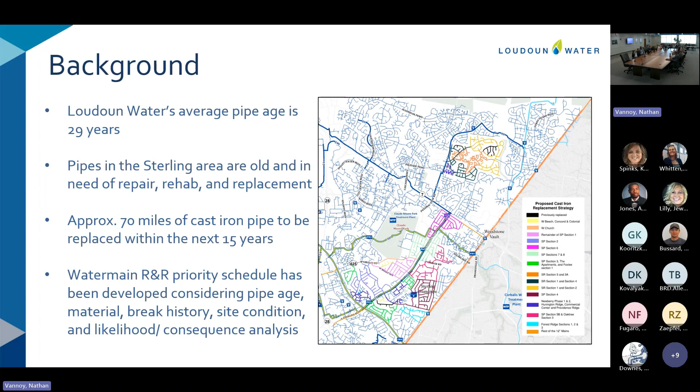Any question? If not, I'll be talking more about the specific project today. The project for your consideration today is again central system in Sterling area, in two different areas, Countryside and Sterling Park.

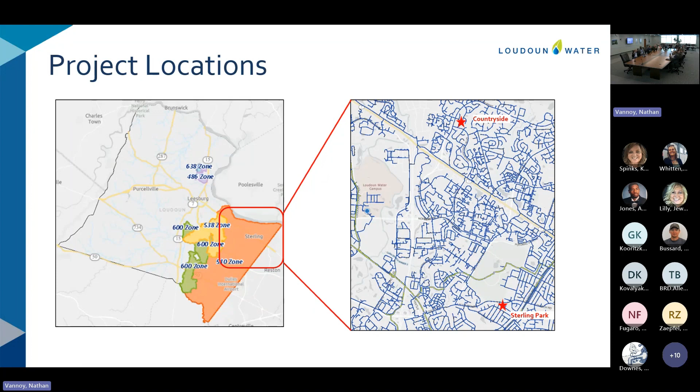Dialing deeper into the project location, we're talking about approximately 3,000 linear feet of pipe replacement, in Oakdale Court and Lindenwood on the left, and West Ash and North Ash Road in Sterling Park. Overall, the goal is to replace about 3,000 linear feet of pipe. This will impact about 77 service lines and several fire hydrants and valves. The reason we prioritized this particular project early is there's known extensive corrosion in this pipe and a much higher concentration of breaks in the last 5 to 10 years.

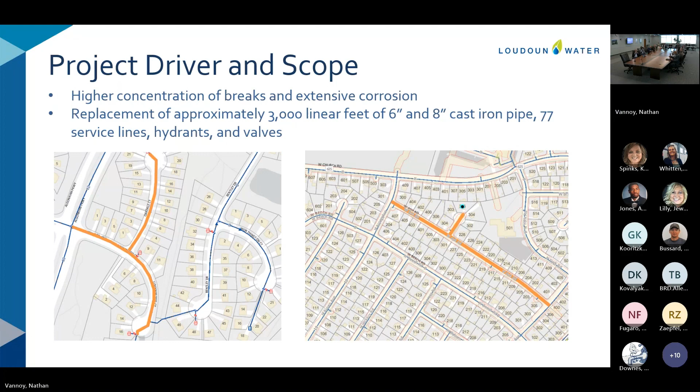For this project, we have selected J2 Engineers as design consultant. J2 Engineers is one of our civil basic ordering agreement consultants. They've done projects like this for us before, several, and they're also well regarded to do a water main project like this on the private side. In this project, J2 Engineers' scope can broadly be categorized into project management, design services, permitting, and bid phase services. A lot of survey, geotechnical investigation, and utility locating is needed on this project. We do anticipate significant coordination with VDOT, just because of the impact this project would have on local traffic and residents.

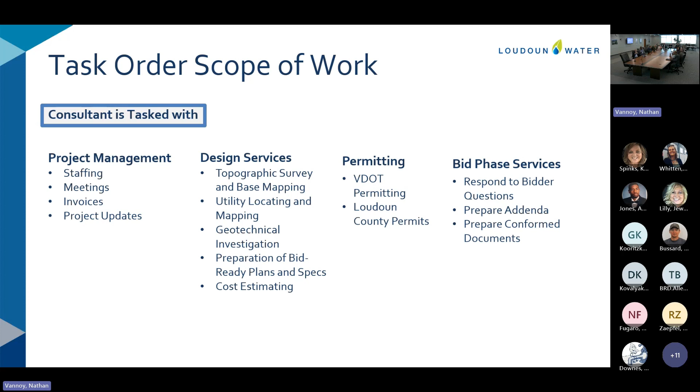Any questions on the fee or scope? Yes, I do have a question. What kind of pipe were you planning to replace the cast iron with? Ductile iron, that's our standard material. Okay, great, that's what I thought.

This fee breakdown is an estimate of the hourly billing? Yes, the way we build it is from the bottom. We identify each and every task and subtask, and then look at what labor category is needed for every task and subtask. There is some negotiation, and that's how we were able to agree on this fee. Clearly there's a lot of field work. Oh, there is a lot of field work on this project.

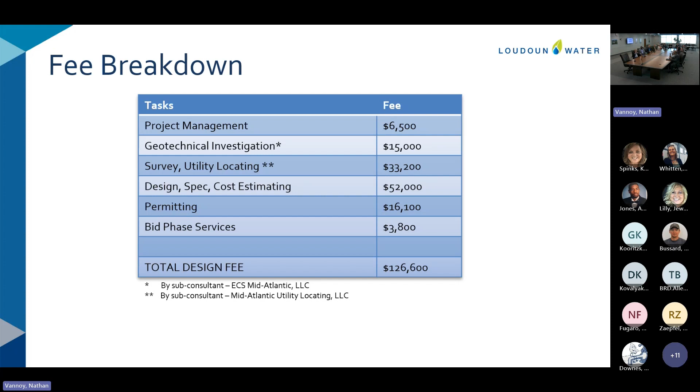Do we have any asbestos cement pipe in the system? Not in the water system that I know of. We do have that on the sewer side, but no asbestos pipe in our drinking water, potable water system.

On project schedule: it's a relatively small project, but we're being a little conservative with our estimate on the design, mainly because of the time it may take for VDOT coordination. We're estimating 16 to 18 months for design, 3 to 4 months for bid, and 18 months for construction, which includes about 5 to 6 months for material.

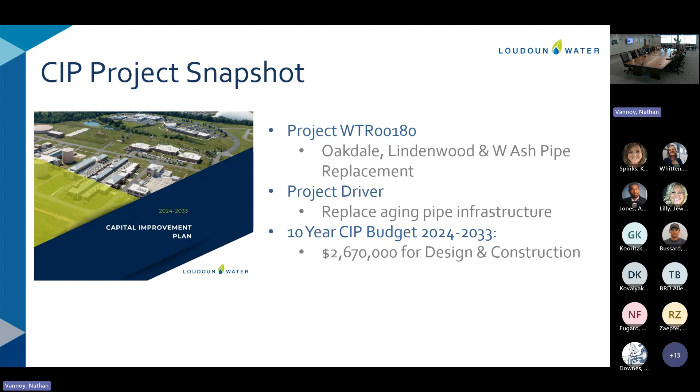So with that, I have the motion in front of you. Who wants to do it? Any other questions? Thank you.

I can make the motion. I move the recommendation to the board to approve award of a design task order for the Oakdale, Lindenwood, and West Ash pipe replacement project to J2 Engineers Incorporated for an estimated cost of $126,600, with an approximate 5% contingency to be controlled by the general manager, for a total authorized budget of $133,000. Additional costs will require board approval, and I'm recommending this go to the consent agenda for the board.

Do I hear a second? Second. All in favor? Aye. Nobody opposed? Thank you.

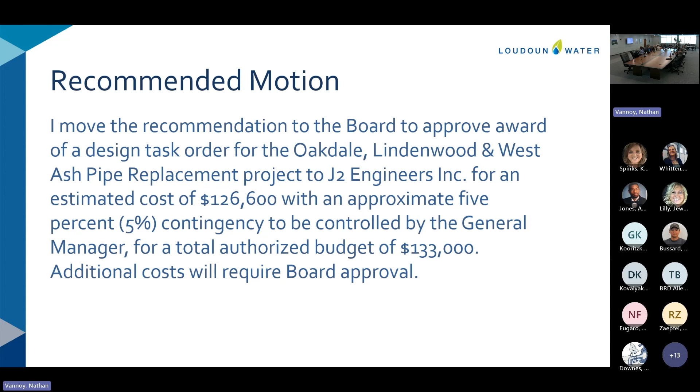Thank you, Mr. Chairman. Is it consent or action? No, consent. I don't think she heard you. Yeah, I did that.

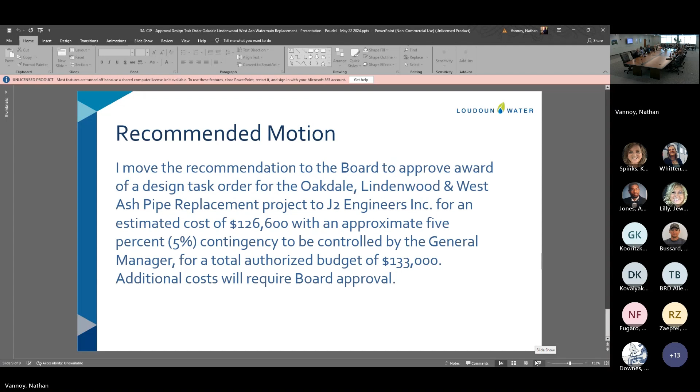Okay, the next item is an informational item, joint county partnership projects.

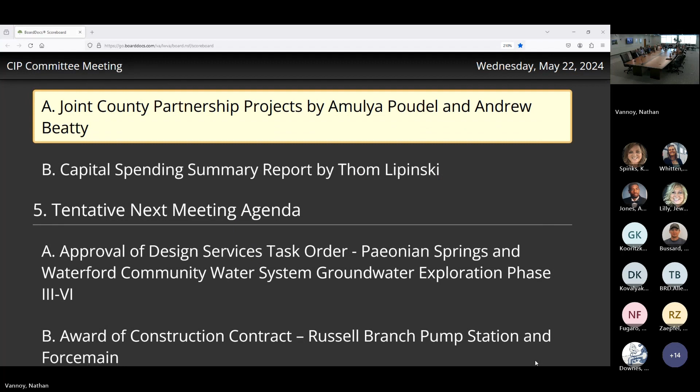Good morning, Mr. Chairman. Is Terry on? Yes. Okay, go ahead. Good morning, Mr. Chairman, members of the committee. My name is Andrew Beatty. I'm a manager of planning initiatives here at Loudoun Water, and Amulya and I will present this informational item on joint county partnership projects.

Just a little bit of background, as you may already know, we do have a partnership program with Loudoun County called the Water and Wastewater Program. That was initiated really through the execution of our MOU back in June of 2015, almost 9 years ago to the day, actually.

The goal of the program is to have an avenue for residents within the county and communities to come together who are experiencing issues with their water or wastewater systems, their individual systems generally. It's a place for them to come and apply for assistance to the county. So that's the goal of the program.

What the MOU does is lay out the roles and responsibilities between county staff and Loudoun Water staff. County staff leads the application period, the outreach, and manages the program, whereas Loudoun Water's role is more on the technical side, where we would take the lead on conducting feasibility studies for these communities whenever they apply. Should a project move forward, Loudoun Water would take on the design and construction and ultimately the operation and maintenance of new community systems, if that is the solution.

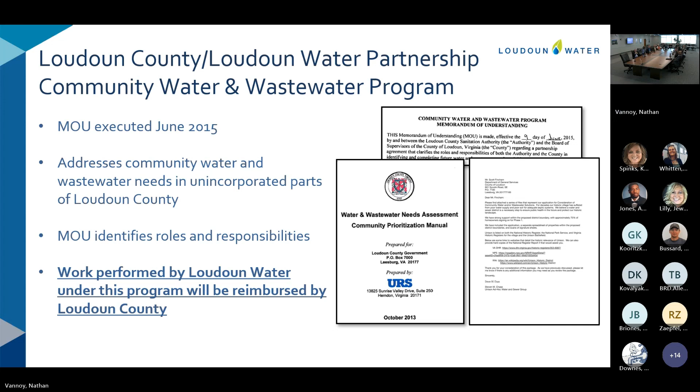The other 4 projects are all in the rural policy area, where communities have been experiencing water and/or wastewater concerns.

I noticed in the news that Waterford's starting an archaeological project. Does that have anything to do with the water system? No, not directly. That's being undertaken by DTCI for a larger landmark project looking at traffic calming and stormwater issues and that type of thing. So it has no direct connection.

I'll first talk about the projects in Unison and St. Louis. Unison is a small community of about 34 homes. They applied to the program back in 2020, and Loudoun Water scoped it and brought it to the board, completing the feasibility study in 2023. The goal was to look at both water and wastewater concerns they were experiencing. The recommendation from that study was for a new community water system and a new community wastewater system.

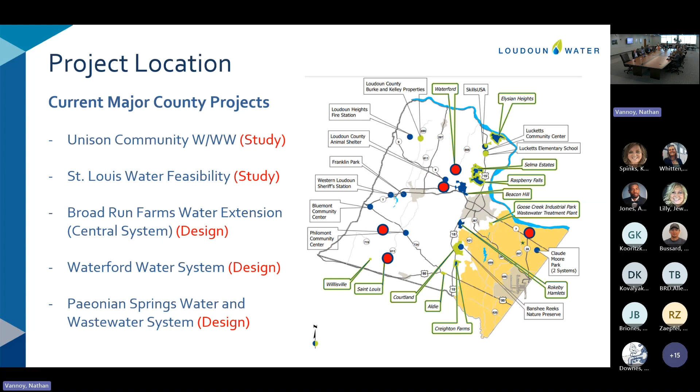Broad Run Farm Water Extension Project.

Again, this project has been going on for a while. This abandoned landfill, Hidden Lane landfill, in 2017 or 18, EPA designated this abandoned landfill as a Superfund site. And as part of their remediation project, EPA decided to extend public water mains to this area where EPA determined their groundwater wells to be contaminated because of this abandoned landfill.

This area in green shade here represents a portion of the community where EPA will extend the public water mains and connect all homes there into the public water system. After EPA decided that, the county decided to extend public water main to the remainder of the community, which is the pink shade to the left, and Loudoun Water is managing the county portion of the project. I'll be talking more about the county portion of the project that we're jointly managing with the county.

This project, the Broad Run Farms project that Loudoun Water is managing, it includes approximately 22,000 linear feet of pipe, 8-inch to 12-inch. On the county portion of the project, there are 311 lots. Combined with EPA project, there are 453 lots in Broad Run Farms community.

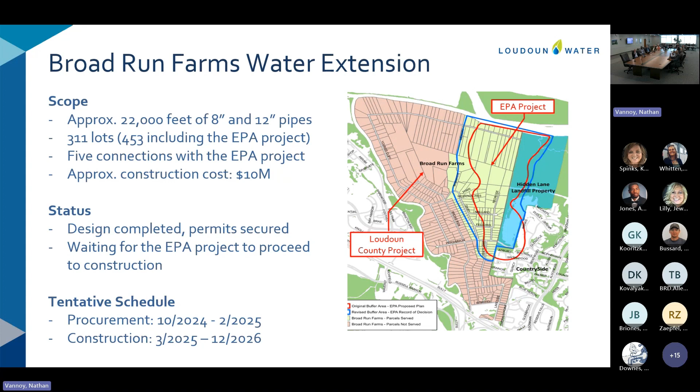Next here I have is Waterford, and a couple of different things happening in Waterford. There are 3 major projects underway in Waterford going on. The first one is Loudoun Water's project that you all have seen before. We have a wastewater community system, existing community system in Waterford. We are in the process of upgrading that plant.

Now that is Loudoun Water's project. The county is not directly involved on that project. The second project in Waterford is the community water system. I'll be talking a little bit more about this one in the later slide. So this project, this is the county's initiative managed by Department of General Services.

We are assisting the county per our understanding with the county's water wastewater program. The third project in Waterford is a larger infrastructure improvement project, sometimes referred to as the landmark project. It's looking into improving drainage, traffic calming, sidewalks, and burying the overhead electric. This is the county's project, managed by the Department of Transportation and Capital Infrastructure. We're only involved because of the way the schedule lined up.

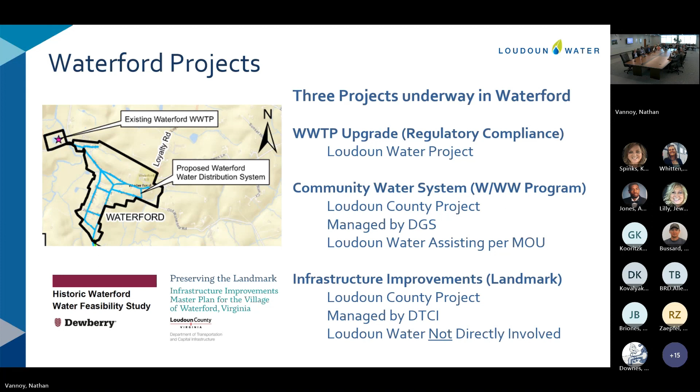We'll definitely be inspecting, since it'll ultimately be our asset, but in terms of selecting the consultant that designs it, we won't have involvement on that side. It'll also have to go through our land development process for review and approval.

This slide is specific to the water system in Waterford. Waterford has known well yield issues, more on the quantity side. The county initiated a water feasibility study in the community, completed in 2022. The current wastewater service area has 145 lots within that study boundary, and we're looking at that same service area for the water extension project too. The study recommended that a public community system be extended to the community. The high-level design cost estimate is $1.5 million, with a construction cost estimate in 2024 dollars in the range of $10 to $17 million.

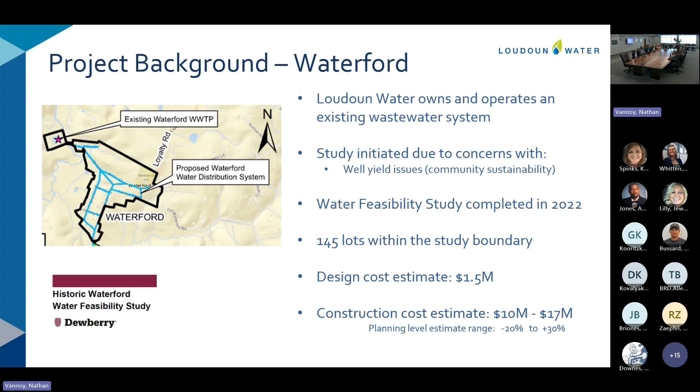The next project, not very far from Waterford, is Paeonian Springs. There is no community water system or wastewater system there. The community faces challenges on both quality and quantity for water, and on the wastewater side, many small, narrow lots have non-compliant waste disposal systems. The county initiated a study, completed by Loudoun Water with Dewberry, wrapped up in 2019, with a couple of supplemental tech memos completed over the next few years, finishing in 2022.

In Paeonian Springs, after several iterations, the boundary we settled on includes 201 lots we're currently looking at. It's a bigger project there. The design fee is in the range of $3.5 million, and the construction cost estimate is $34 to $56 million, again in 2024 dollars, not escalated to the midpoint of construction.

Who would be paying for that? The county, and the county is hoping for federal government support as well.

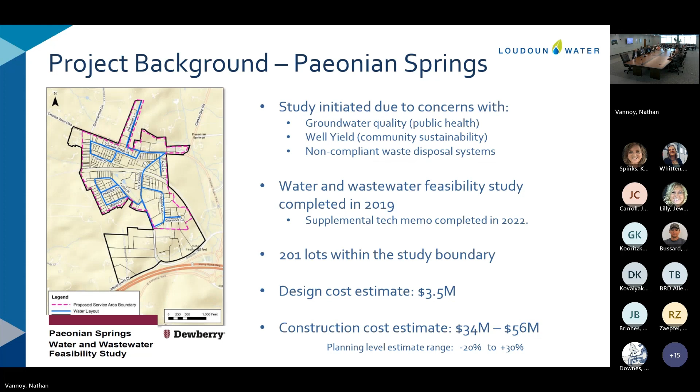Before this slide, the two other slides I talked about, Waterford and Paeonian Springs, at the time those studies were completed we were looking at these two communities separately, with local solutions for each. However, since the studies came together around the same time, there were some additional considerations.

In April 2022, the Board of Supervisors approved $3.5 million in federal ARPA funds for the design phase of the Paeonian Springs water and wastewater work, of which $3 million the county transferred to Loudoun Water. Last year in February, the Board of Supervisors approved $1.5 million for the design of the water system in Waterford. In that same meeting, the Board directed county staff to look at the feasibility of addressing similar needs in the two communities, which are only about 2.5 miles apart, by coming up with one system that could serve both communities.

So what that means is evaluating the feasibility of taking Paeonian Springs sewage along Clarkes Gap Road to the existing treatment plant in Waterford for the wastewater component, and for water, to evaluate if it was feasible to locate wells between the two communities, and then have one treatment plant that can serve both Waterford and Paeonian Springs.

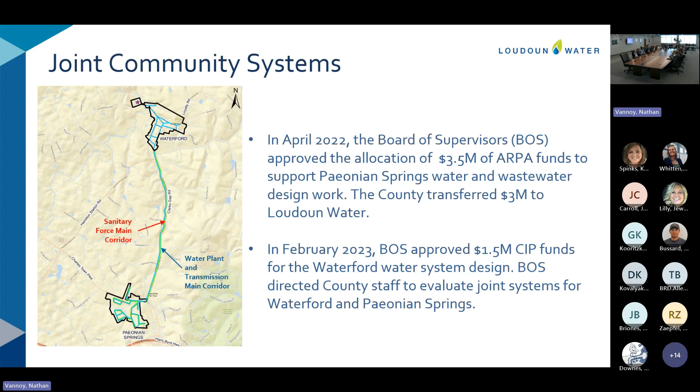So, okay, the groundwater study is carried out in 6 different phases. The first phase is desktop study. You know, it's actually easier with the exhibit, so I'll talk about it on the next slide. Thank you. Yeah, that's a better slide.

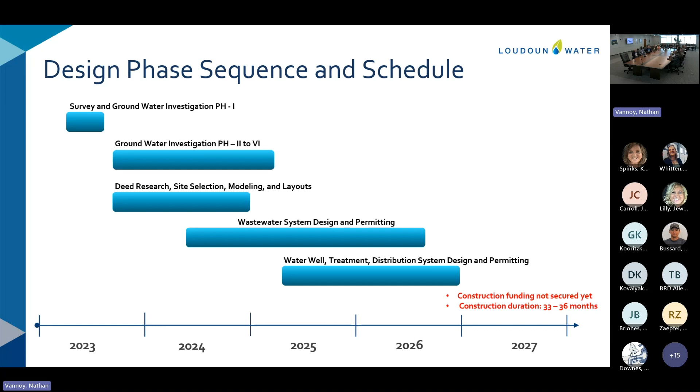So the overall project schedule - the goal is to be done with design and permitting by the end of December 2026. The Paeonian Springs component of the project has received federal funding, and one of the ARPA funding requirements is that the design money needs to be spent by December 2026, which worked perfectly with where the project was when we started. The construction funding has not yet been secured. Assuming it is secured by the time design and permitting is completed in December 2026, we expect 33 to 36 months for the duration of construction for these projects.

So this is where I was planning on talking about groundwater. The groundwater study is carried out in 6 distinct phases. As part of the first phase, our groundwater consultant EGGI cast a wide net - they did a desktop analysis of a wide 2,000 feet each side of the Clarkes Gap Road corridor. Out of that desktop study came certain patches of parcels which they concluded have potential for higher yield.

There were about 55 parcels identified. Then after public outreach and coordination with property owners, we were able to get authorization from 14, 15 property owners to carry out a geophysical survey. In February, EGGI staff went out to the site and did this non-invasive geophysical survey across those 15, 16 parcels.

Out of that field investigation, they've identified 8 or 9 test well locations spread out over the Clarkes Gap Road corridor. The next task is a memorandum of understanding where the county will take the lead on public outreach and property owner coordination, which is an ongoing discussion right now, since the next work involves bringing in a rig to do the test wells, which is more invasive and requires more coordination with property owners.

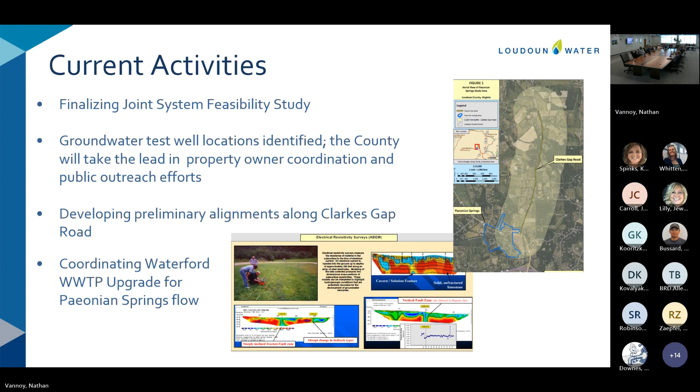A 3-mile force main on a scenic highway in Western Loudoun - it's not going to be easy. I'm glad you guys are keeping it straight, at least. There's some of that you want to stay out of, yes. All right, if that's it, that's very good. Thank you, that's very good. I think I understand it, believe it or not.

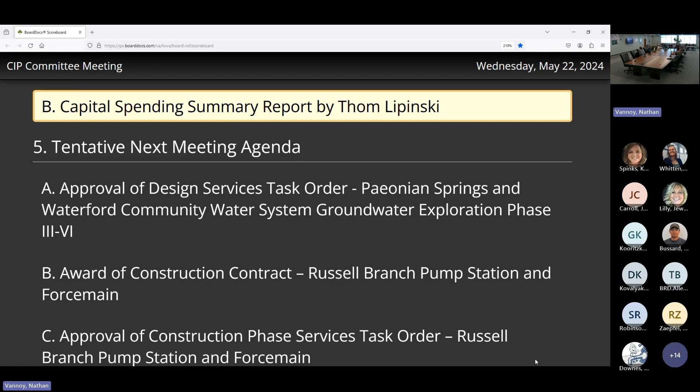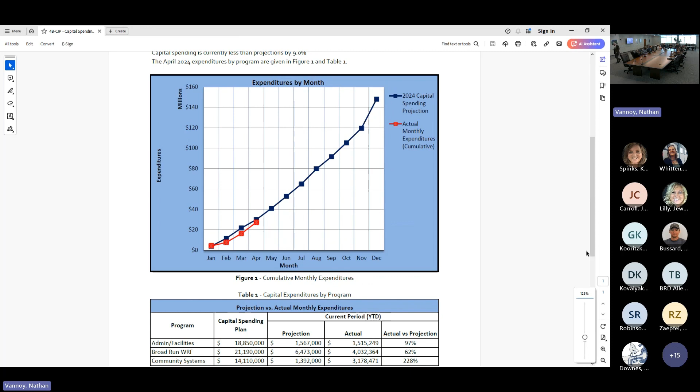Thom Lipinski, Capital Spending Summary Report. We're getting close to the end of the meeting. This is the capital spending through April. The projection at the beginning of the year was 30 million dollars, and we've spent actuals of about 27.3 million, around 91%.

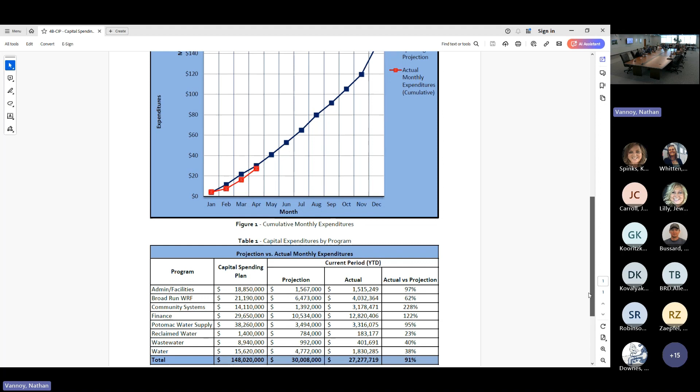I have one more piece of data to share. Speaking of 91%, you were recently informed that the audit was complete for 2023. Congratulations to Sally and the rest of Loudoun Water - the books on 2023 were closed. We can report that for the 2023 capital spending plan, the budget was 113 million, and we spent 103 million in 2023, or 91% of what the budget was. That was a pretty successful year for us last year, so we're on track to do that again this year.

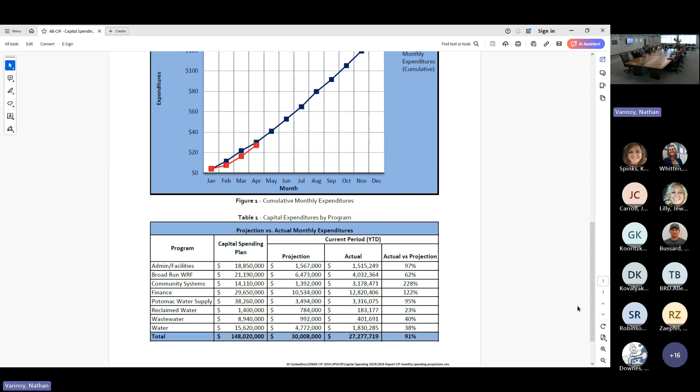Hopefully as we get closer towards the end, we stay around that 90%. Very good. Are there any questions? We like it under the blue line. Yes, that's the last item, if I'm not mistaken.

We get a vote to adjourn? And Mr. Sultan, I'd just like to mention again, as a reminder, the June meeting has a rather lengthy agenda. Bring your lunch, it's gonna be a long time. How many items were there again? There were like 10 or 11? Eight items total.

As a reminder, one of the items is going to be related to the groundwater investigations for the Waterford Paeonian project. A couple of the additional items are related to Broad Run Phase 3, which we plan to cover at the board retreat. So we're attempting to help inform on these items in advance due to the lengthy agenda.

So what you're saying is do your homework, read the packages before you arrive. That would be helpful. I think in all the presentations we've recently given some background - Russell Branch is coming forward, we just brought you the Russell Branch Design Amendment, and then the Brambleton 600 water booster pump station, related to the Dulles South one we brought forward a few months ago. There's some ties to previous presentations if you want to go back and look at those as well.